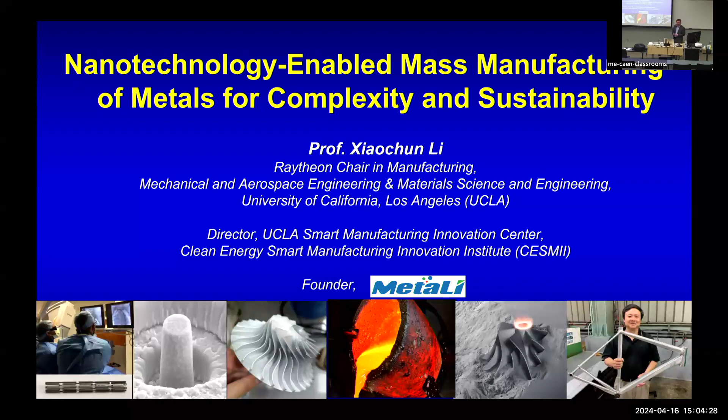Today I'll talk about nanotechnology with casting, mostly on the solidification processing side. My talk will cover different topics: introduction, and especially nanoparticle dispersion for mass manufacturing, then how we use nanoparticle effects for material control and manufacturing control, and briefly mention commercialization and a summary.

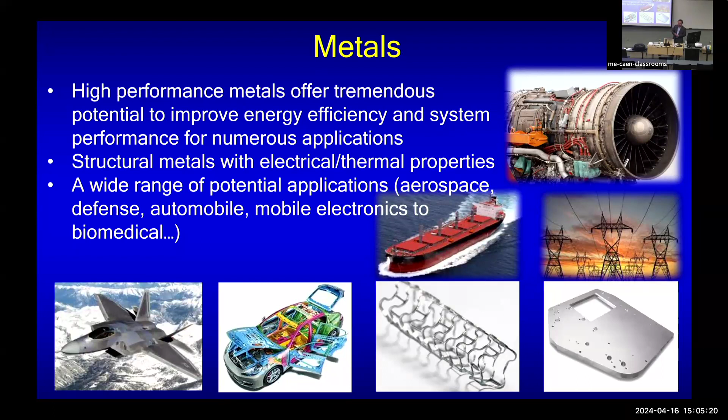Metals we already know, right? We cannot live without metals. Although people say we cannot live without internet or AI, without metal, guys, we are doomed. Metal has always been here for thousands of years, and I still like it. High performance metal is obviously very important for our life. Needless to say, electrical, thermal, chemical—almost everything. So there's a wide range of potential applications, almost everywhere: electronics, automobile, defense, biomedical, aerospace.

From the manufacturing or metallurgical method point of view, at a high level we have developed 4 platforms for guidance about the manufacturing process: alloying, like steel making—iron, carbon—and a lot of plastic deformation; also ways to make small grains, whether liquid or solid; or heat treatment to cure different properties. So these are mostly the 4 platforms we use to do the work.

This has been successful for human society for thousands of years, especially the last 200 or 150 years. It's been very fruitful and successful. But obviously we also realize metal became very mature—we take it for granted. That's why metal is not sexy anymore.

Certainly we still have some areas where we want better properties, and one area I especially want to mention is manufacturability. A lot of metals we develop as material scientists—95% of the time the material is so good, everything great, but they cannot go to societal use because of manufacturability problems. You cannot make them massive, you cannot make them low cost enough for that application.

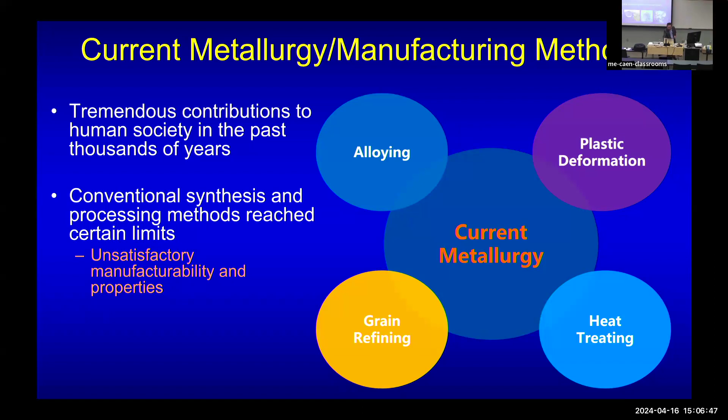Since the 90s, we've known the new dimension—I try to bring the metal side and almost bring to every engineering discipline—is nanoscience. Today we just take it for granted; we have a lot of nanoscience research that, by default, all graduate students or engineers must know.

Nanomaterials or nanoscience: we already know this, so I won't say too much detail. It's an increased ratio of interfacial area to volume, so intermolecular and interfacial forces will dominate all the interactions, and they induce unusual physical, chemical and mechanical properties. Since the 1990s there's been a lot of research, and the knowledge base built up mostly for lower temperature chemistry. The high temperature side is scarce, a little bit.

In recent years, we can move more and more into harsh environment technology, studying their behavior. Practical application is the painful spot when everyone talks to nanoscientists. What do you do? What do you apply to industry? A lot of guys say, oh no, I don't know.

That's the problem, relatively slow. Nanoscience and nanotechnology for industrial application, especially when we come to Michigan guys doing massive manufacturing, a lot of nanoscience people just say, oh no, don't talk to me, I'm not talking about massive production. So practical application is really slowed down. That's why in the last 5 years, nanotechnology is not fancy anymore. A lot of guys have negative impressions about nanotechnology because industry just doesn't get enough benefit from it.

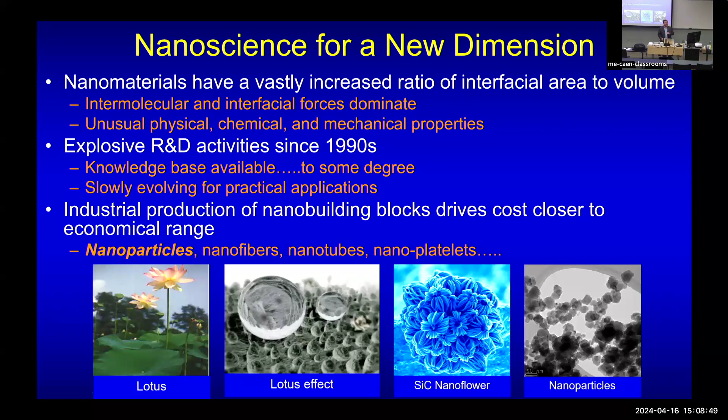For the metal guys, I'm one of the few, just like Alan. I hold the metal guy position somehow - I stuck with metal, I like metal. So what can nanotechnology do in metal? Metal can be in liquid form or solid form. In liquid form, you use nanoparticles to generate so-called nanofluids, talking about chemical, thermal storage, or battery applications - recent years for sodium, lithium, they're all metallized. How to control the dendrite or other issues, that's interesting. But most, in traditional manufacturing and metallurgy, it's about how nanotechnology works in solid state and how to control properties.

The actual theory about nanotechnology in metals is well developed, and we already know what nano can do if we do it well. All of us talk about using nanoparticles or nanoprecipitates to control strength - this is well established since the 1930s. And the pinning effect is one of the key effects to control for high temperature and creep resistance, for high performance applications.

Of course, recent years there's a lot of so-called electrical, magnetic, thermoelectric effects, mostly dealing with interfacial control using nanoparticles or nanophases. For me, I'm a manufacturing guy, and from the beginning I always set the goal for massive production and how to get nano into larger scale manufacturing.

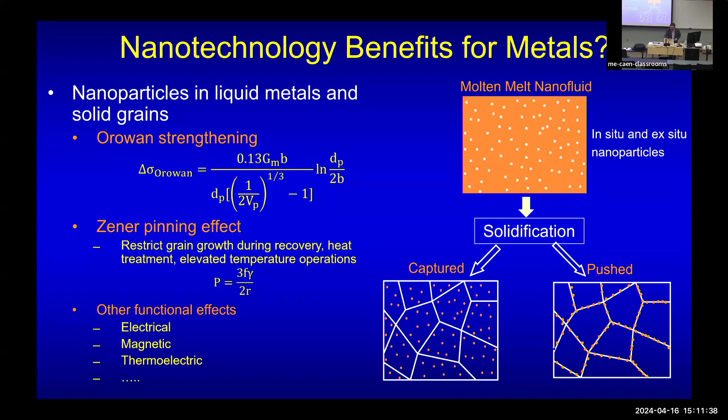So right now I'll talk about a key part of my research. This problem hurt me, dragged me down for 15 years - how to get nanoparticles dispersed in molten metal. At the beginning it seems like a very simple problem, but it turns out to be a very difficult one. And then we studied the physics.

The interaction between nanoparticles - nanotechnology came along in the 1990s with a lot of research in water-based and polymer-based systems, and they have some successful stories. Just like milk in the morning, it's self-dispersed - milk is really nano droplets that self-disperse because of a double layer effect that repels the particles. Because particles naturally at the nanoscale attract each other through van der Waals attraction.

And they will just universal, right? It cannot go against that, it's quantum mechanical. But the problem in nature is how to make them—since they like each other so much—keep some distance, some personal space.

This is a tough one, right? So traditionally, we can use electrostatic or double layer, or in polymer engineering, get surface surfactant to create steric repulsive force against them to keep space, to disperse. But unfortunately, in molten metal, this is all difficult. Actually, we have no way to accumulate electrical potential on the surface.

But of course, recently, Alan, that student, might have some special thing. I don't know, that's still a mystery. So they might have something, I don't know.

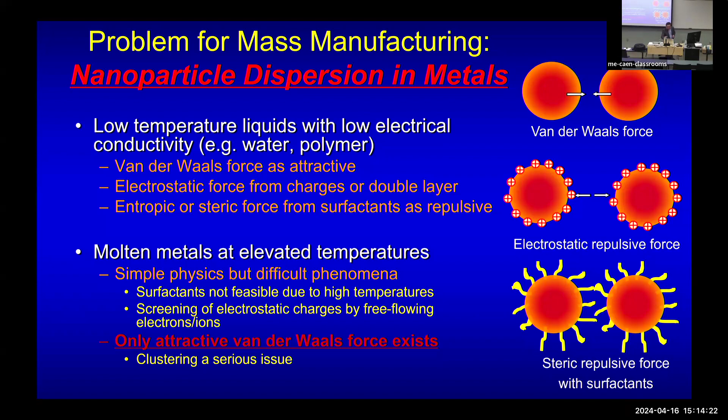So until 2015 we solved the problem by really going into nanoscience, going into physics study—especially looking at inorganic high temperature interaction between nanoparticles in the quantum mechanical domain. It's very difficult, actually, it is.

Okay, so by then we found out, this 2 nanoparticle—we wanted to keep them apart, right? Originally we thought we need to find a force. But later we found out we do not need to find a force. Actually, we just need to find an energy potential to do that. The force is the first derivative of energy, right?

So once you open up that, then we study the interaction potential between the nanoparticles. Normally they attract each other by the Van der Waals potential, right? This is a quantum mechanical factor we call the Hamaker constant—how much quantum mechanical effect they'll have, attracting each other in air or in vacuum.

And actually, we found out if these 2 nanoparticles can be close enough—quantum mechanically close enough—to the molten metal, then these two interacting with each other will reduce this potential significantly. Right? Traditionally we cannot do that because mostly we choose a nanoparticle as a ceramic particle, and the molten metal is metal, right? They just don't like each other.

Quantum mechanics is so different, until we realize there are some ceramics—like metallic ceramics—that are very stable, that have partial metallic bond. So they can get closer quantum mechanically, and then, getting closer, we can reduce the Van der Waals potential.

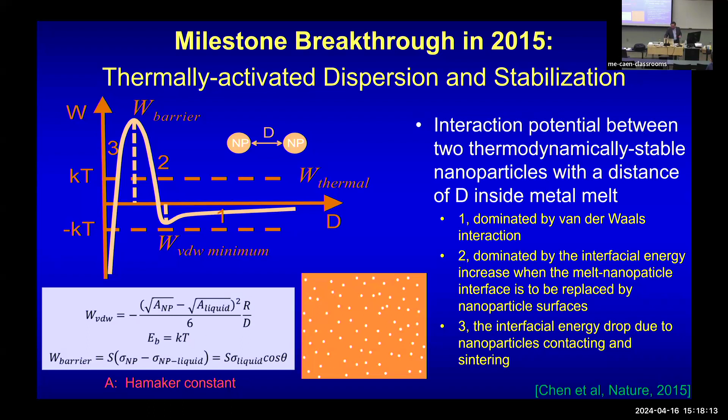This is one of the key things we discovered in 2015. After we discovered that, we were open, because we knew we could do scale-up production since nanoparticles can be dispersed by themselves. We do not need to force them. We used to use hammering, acoustic methods to hammer them off, but they always go back. But now we know we don't need to do anything—they will separate by themselves. This gets nanoparticles dispersed even at low percentages, 14%, 25%, or lower right now. Even at 1%, they separate.

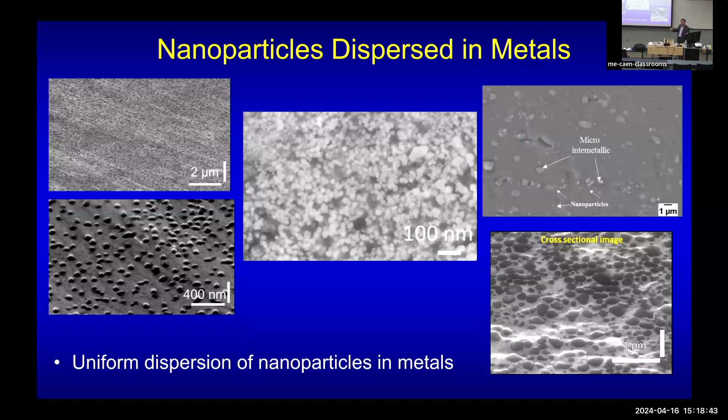That's good news. Once we have that, we can do all the manufacturing or microstructure materials control. The first thing we talked about is what nanoparticles can do, helping us from the traditional metallurgy or manufacturing side. Back in 2005, we always found one thing: we put nanoparticles in and always get a grain refiner—very good, very effective grain refinement.

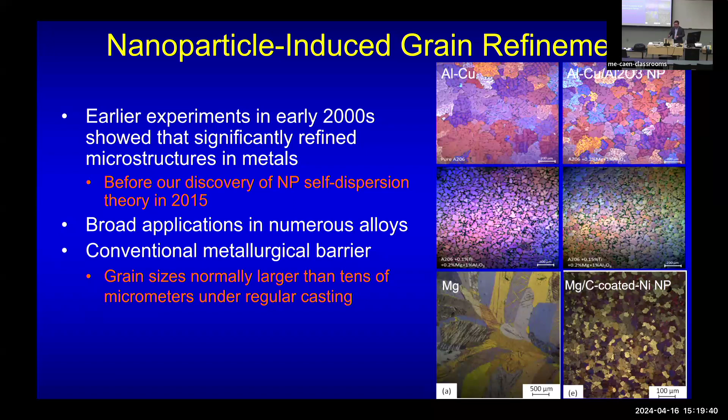Before 2015, we didn't have the self-dispersion theory yet. Our dispersion was good, but nonetheless the grain refiner was always good. But commercially, we couldn't get success because we couldn't get scale-up production. Also at that time, nanoparticles were more expensive than conventional grain refiners. We didn't have anything revolutionary at that time to make that happen. We can also see why at that time we couldn't break the traditional barrier.

Without self-dispersion nanoparticles, the conventional fundamental limit for grain size during casting is governed by this equation. The grain size equals how many nucleants you can have, how effective the nucleants are, and especially the growth restriction. Traditional nucleant theory is dependent on chemistry—when you push that solute out, it enriches in the front and blocks, pushes back, but it has a limit. Normally Q is about 50K, mostly in industry. That's why we didn't get smaller grain size, we got larger grain size instead.

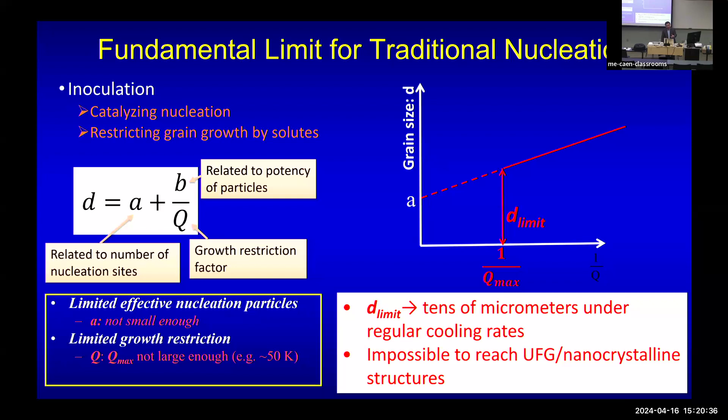That's why in traditional casting, you normally get hundreds of micrometers or tens of micrometers at minimum, really. You cannot get better than that a lot of times, unless you go with really fast cooling. But when you go with very fast cooling, you do not get mass production. So this is the dilemma there.

It's fascinating though. We studied how nanoparticles compare to traditional microparticle-based grain refiners, because the most traditional grain refiner is based on about 1 micrometer to 6 micrometer particles. They're very effective, already used in industry very effectively and inexpensively. So we studied nanoparticles compared to microparticles. We found actually we were not as good as them, because we needed much more undercooling—the smaller size particles need more undercooling to solidify, to grow the solid crystal.

So on the surface, it looked like nano cannot win. That's why around 2005, 2008, after the PhD graduate, we thought, oh, we should quit this direction because we cannot win. For this to win, we need more undercooling, meaning we need more of the processing condition to enable that.

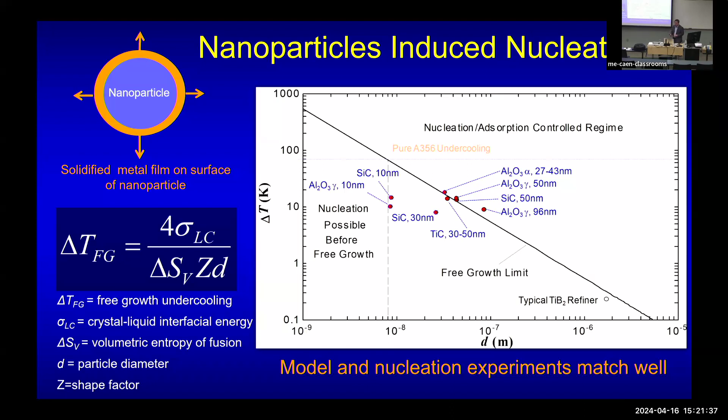Until 2015, we finally solved the self-dispersion of nanoparticles, and we came back to study the nucleation phenomenon. We found surprisingly something really unusual happening here. We all know if you work on the metal side, how to get nanocrystalline or ultra-fine grain in metal production is very difficult. Most guys rely on fast cooling for thin films, for laser processing, thin film deposition, and in solid state, use severe plastic deformation.

But in production scale, in casting, nobody can do small grains really, in the larger one. But surprisingly, in 2015, in pure copper, we put nanoparticle in a few percent. Surprisingly, just using regular casting, like 4 degrees C per second - it's quite slow, almost like sand casting and permanent mold, that kind of production cooling rate - we found really, really small grain, ultra fine, even nanocrystalline. So this really shocked us.

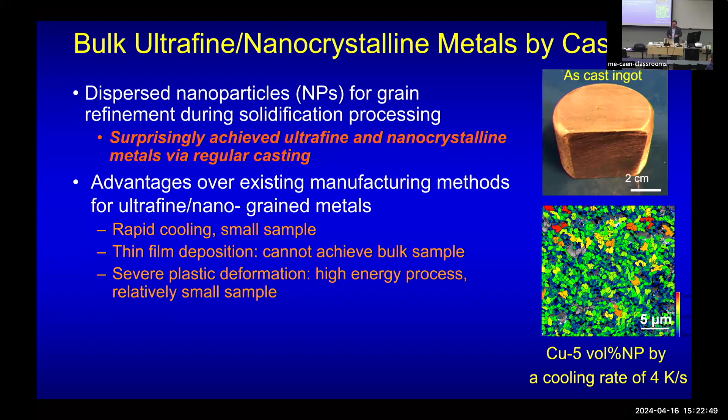Because we thought it's impossible, but right now it's made possible. That allowed us to study why this happened. We found out the more important thing is about nanoparticle-enabled growth control, basically restriction of growth. It's not about nucleation. Early on we always think, hey, more nanoparticles means more nucleates growing - no, it's not like that. It's more important that it's not only about nucleation.

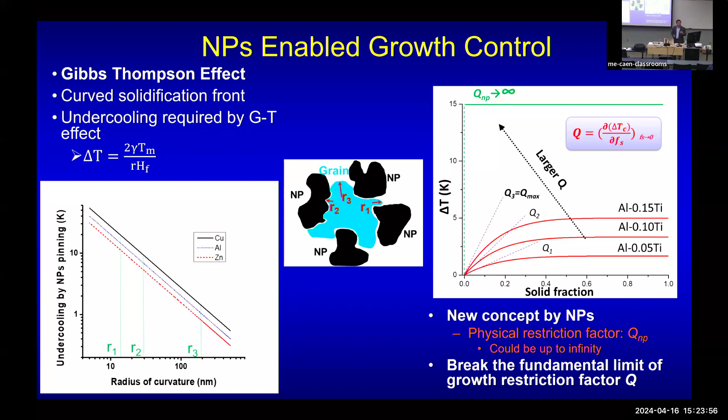So this way we really can break the fundamental limit of grain refinement in traditional casting methodology. Traditionally, the reason we couldn't get small grain is because they stop here - the Q is small, and this will stop here. Your grain size is dictated by this process, you couldn't realize your full potential. But once with nanoparticles, they not only have infinite high Q, physical Q - they almost drop here - they also allow a lot of nucleation. So you can really potentially go to nanoscale. This is the theory: nanoparticle restriction goes to ultrafine grains.

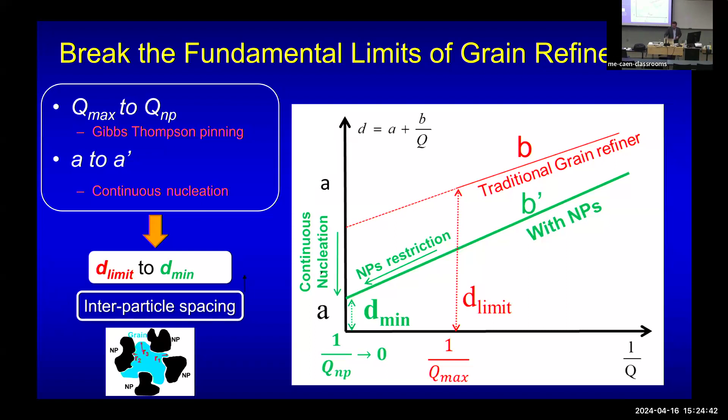And here is the difference. In traditional methodology, free growth theory, you have nucleates - sometimes we use grain refiner to make more nucleates. But once they start to grow, they grow so quickly - it's naturally so, the free growth theory: I grow, I win. So they also release latent heat, and they will kill all the nearby competitors - the nearby competitors get smashed away by this released latent heat. So they just become big grains.

But in the nanotechnology case, first of all, we need to rely on nanoparticle self-dispersion. Once you disperse well, at the beginning, the first wave, you have some nanoparticle nucleate grains - some big ones, some small ones, nucleating. But when they want to grow, the nearby nanoparticle pins them down - they block you, they cannot allow you to grow. It's almost like on a freeway, you allow the e-bike guys to go on the freeway and say, don't kill these guys, they have the same right as you. No matter how high speed your car is, you need to slow down.

So this exactly happens - it's almost like socialism, truly socialism I tell you. It's blocked, and then the nearby poor guy says, oh, it's my opportunity to grow now - and blocks you again, and then grows again and blocks you again. So it's like continuous nucleation, continuous growth restriction. This is way different from traditional methodology. Traditional methodology is one shot - I win. Once I win, I grow very quickly, occupying my space as much as possible.

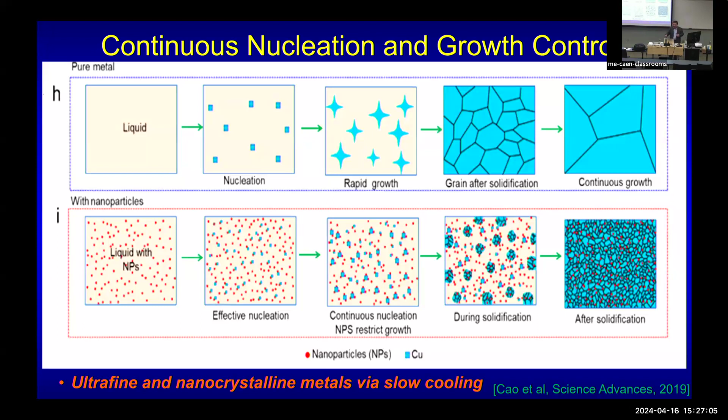Previously, the dendrite stuff, the block liquid here, that's the key for hot cracking, right? But right now, with nanoparticle, they're all globular, very small, uniform - they do not have the issue like traditional hot cracking. That's exactly the reason we do not have the hot cracking issue anymore.

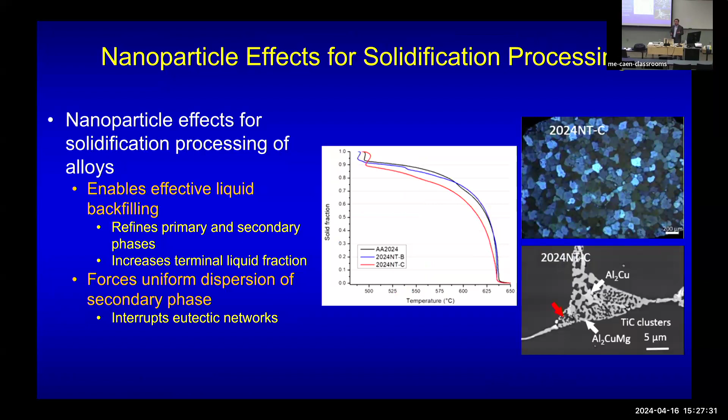This is one of the big discoveries for nanotechnology. It also refines both primary and secondary phases, increases terminal liquid fraction, and makes the secondary phase more uniformly distributed. This makes our mass production much more desirable.

So here I go to the manufacturing. After years of research, instead of focusing on strengthening effect - because from 2000-something to 2010, most of my research focused on how to get stronger metal, how to get better metal -

after 2010, 2015, we mostly focused on how nanoparticles can change the phase, control microstructure, and enable manufacturability of traditionally impossible alloys.

So nanoparticles can help enhance nucleation, restrict grain growth, and modify secondary phase in one shot. Traditional metallurgy needs almost 2 or 3 methods to realize these 3 functions together, but we can do it in one shot using nanoparticles, and get unusual control of microstructure and phases. We can get a homogeneous grain structure, and then get enhanced properties.

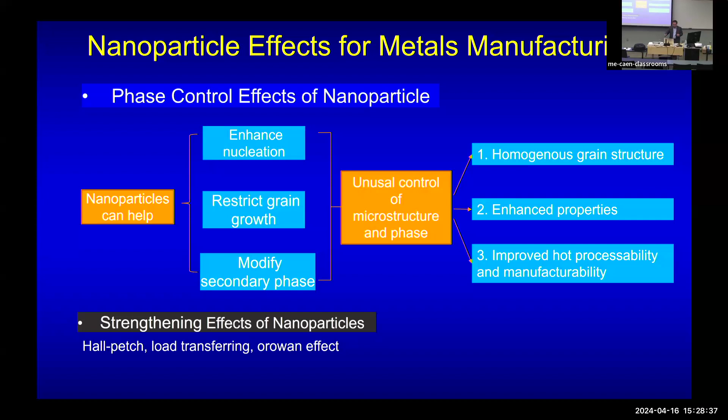And especially here is a new one - I would say our niche here: nanoparticles enhance hot processability and manufacturability. So we'll go to detailed applications.

For example, take aluminum alloys. Aluminum alloys are divided into 2 big categories: one's casting alloy, one's wrought alloy. Casting alloys normally, you want complex shapes but cheaper - production cheaper. Wrought alloy, we want high performance, aerospace and vehicles a lot, high performance. They don't use the same method.

Casting alloys use solidification processing, liquid. Wrought alloys use plastic deformation and machining to get geometry, to get properties. So you can compare the strength, ductility, conductivity, including thermal and electrical - the wrought alloy wins all. So the only thing where the wrought alloy cannot win is castability.

It's difficult, but other things like surface quality, especially anodizing, anodization, for all the cosmetic applications - for example, Apple's very good products, beautiful products, because anodizing makes colors appealing. Normally wrought alloy is doing good, cast alloy is very poor.

So we can see wrought alloy is really desirable, but a lot of times because they're more expensive, people go to the casting alloy for shapes, for low cost. So what if we use nanoparticle, nanotechnology to unify them - basically casting wrought alloys? This is the area we want to go.

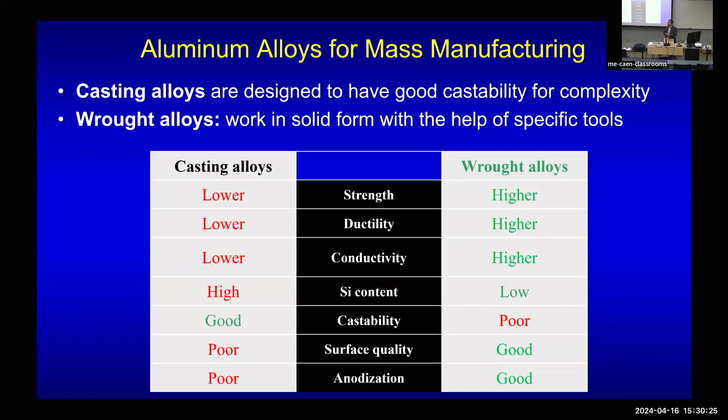Basically, take advantage of the shapes, also the performance of wrought alloys. To be fair, people spend decades working on this area, trying to unify these two together, but it's difficult to solve the hot cracking manufacturability problem, and nano provides a new method.

High performance wrought alloys in vehicles, a lot of 6000, 5000 series, and also aerospace, a lot of 7000 and 2000 series. It's high performance, high strength-to-weight ratio, and exceptional mechanical properties. But unfortunately, normally they are not good for casting - they must go through shaping.

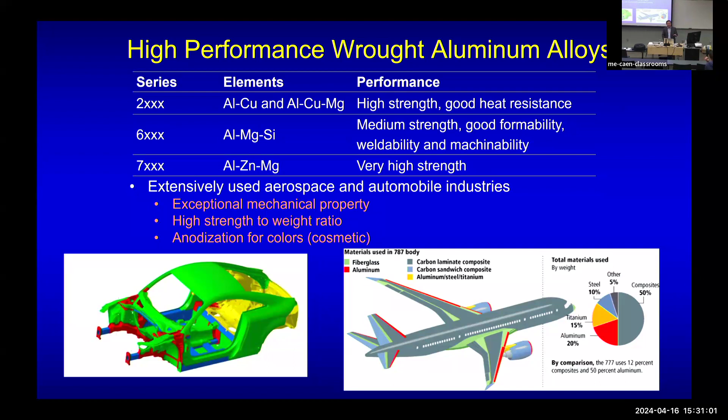But of course, we do that because we have no choice. But I would guess if you have a choice, you want to do casting of this - that will be very fast, high efficiency, and low cost. So this is the way: can we do manufacturing like casting for the wrought aluminum alloys?

So certainly we already identified the problem - difficult, if not impossible, to cast the complex geometries in that 2000, 6000, 7000, or 5000, even 3000 series. So for that, they really have energy intensive extrusion or rolling processes, and energy consuming machining for shapes, and a lot of metal waste for sure.

And they're also much more expensive, actually - not because of material in some way. The material might be similar cost, but really it's about manufacturing cost - how to make manufacturing feasible and low cost. So traditionally, some areas are weldable, but a lot of areas like 2000, 7000 are not weldable, and also have low thermal stability.

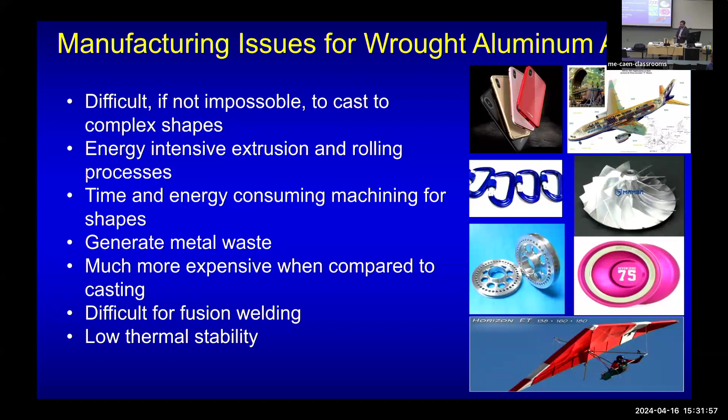So why are wrought alloys, aluminum alloys, difficult for casting? The number one killer is hot cracking susceptibility. It's because during solidification, traditional methodology has dendrite growth, right? They quickly occupy space and then encircle the liquid in the solid phase. The liquid has no way to backfeed, no way to compensate for the shrinkage. Then you have hot cracking there, a lot of hot cracking, or you have huge grain growth there. So this problem is really about contraction and nucleation behavior.

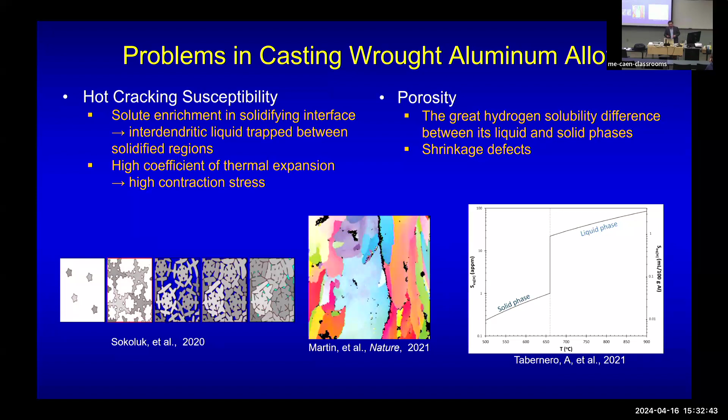And also there's a porosity issue, right? They have hydrogen bubbles during casting for wrought aluminum alloys. And nanoparticles can really solve the problem quite well, right?

With nanoparticles, we always get equiaxed, globular grain, and they grow very slowly, gradually. So their solidification zone, the latent heat zone, is a little longer than conventional because the nuclei grow slower, allowing during the latent state much longer time for liquid to penetrate and backfeed. So this way we can solve the problem, even with low percentage, which is good for industry guys - lower cost, lower percentage, better economics.

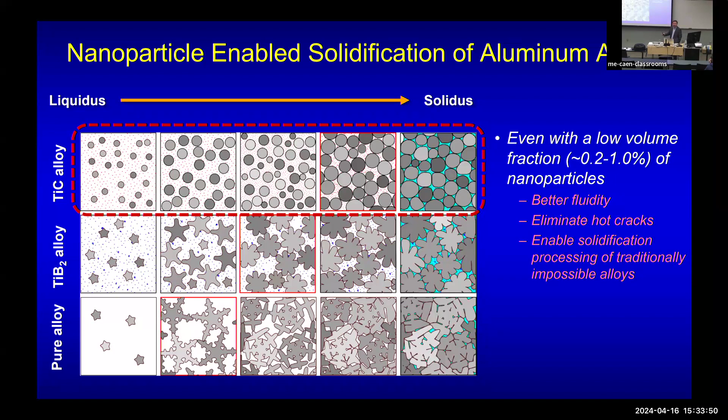And here is the first one - nanotechnology-enabled casting of 7075. 7075 is an aerospace alloy, the highest strength in the commercial domain for aluminum alloy. This is normally very difficult to manufacture. Generally speaking, aerospace industry talks about buy-to-fly ratio, right? Like 10 to 1, meaning you buy 10 kilos, you only use 1 kilo to go to the sky. 9 kilos is all machined off.

So this is really a costly process. But right now you can see we can cast them directly, this shape. Traditionally you need 5-axis CNC milling to do that, but right now in one cast we can get the geometry. And also because of nanoparticles, we get very small grain size with very slow cooling. And even after T6 treatment, grain size is still very small, right?

So this way, for the first time, we can do aerospace alloy casting, solving the manufacturing issue, lowering the cost, no hot cracking, and easy to cast complex shapes. And by this way, reduce grain size, everything, reduce stress corrosion, and especially reduce buy-to-fly ratio by 10 times. Basically, our raw material might be more costly than the original 7075, but the manufacturing cost is 10 times less than traditional manufacturing. So that's where we win. It's more like nanotechnology-enabled manufacturing of the alloy, right?

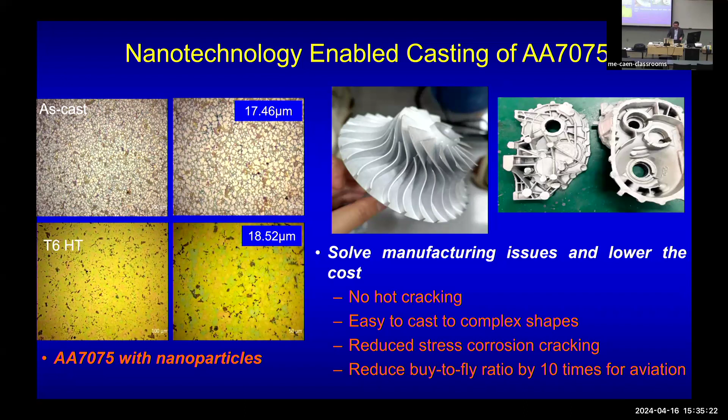And here is another massive production example. Because I'm a manufacturing guy, I'm always looking for massive, big scale manufacturing. After we get self-dispersion nanoparticles, we can do big scale production, tons of it, because with high speed, high pressure die casting, it's almost like 20 or 30 seconds to make one component. That's where, for Tesla guys, they make a gigapress to make a whole car body in one shot, which takes minutes. But this is a very efficient, low-cost way to make complex geometry, larger scale structures, and thin-wall structures.

You have molten metal feeding here, quickly injected at meters per second, very high speed injection. And they talk about cooling rate, about welding cooling rate, 100 degrees C per second. And then the machines can be 80 to 8,000 tons, and today they go to more than 10,000 tons now, right? And that's the machine - very high speed, very highly automated.

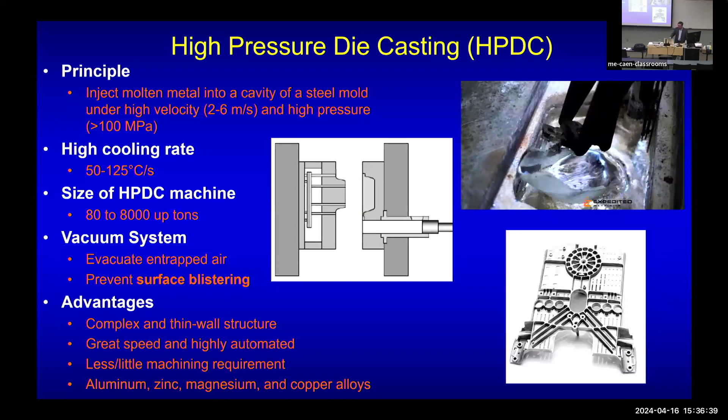A lot of consumer electronics, automobile industry rely on this process a lot, to make low cost and high performance components, especially focused on aluminum, zinc, magnesium, and copper alloys. And high pressure die casting is a quite rapidly growing industry, because more and more components are produced by high pressure die casting.

Even going to larger scale, like Tesla guys, with the gigapress. So all this is really for automobile, electrical, electronics, and cookware - everything, right? Still about 8% annual growth.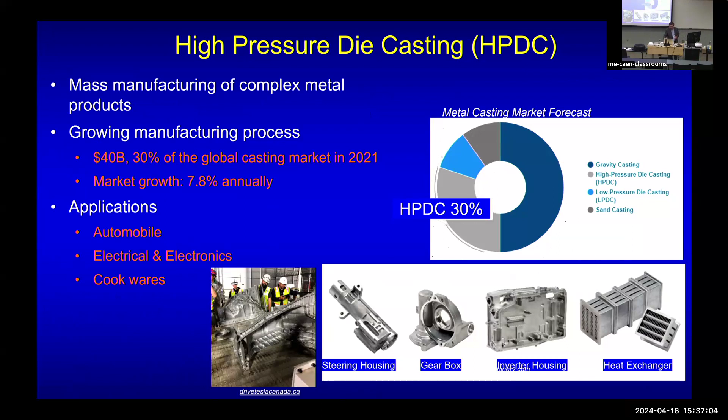And here, traditionally, we have a problem for high pressure die casting of high performance aluminum alloys, like wrought alloys - 6061, 2024, 7075. You cannot do high pressure die casting because hot cracks will kill them. And people tried, okay? It's not like people weren't trying for a lot of time. It's cracking like crazy, you couldn't solve the problem. And also poor fluidity because they couldn't flow well, and also they have a lot of shrinkage and gas porosities.

But with our nanotechnology-enabled mass manufacturing, by solidification, we solve the problem, right? We eliminate this, enhance this, and mostly distribute that, and also eliminate that.

So all this come together, we put here. Really, nanotechnology combined with wrought aluminum alloys and combined with mass production, like high pressure die casting or squeeze casting, which is another type of high pressure die casting, combined together we can make mass production of aluminum components, and even make anodizing components.

So here is some of the products we produce, not in my research lab, but more in my company, Metali. So this commercialized all the products. You can see we can produce that nanotech-enabled. Traditionally, it's impossible to use this alloy to make the components, and also make anodized colorful products.

So this one, frame, and this one I mentioned, this is for electric vehicle control. Traditional gasoline vehicles might have maybe $200 something for the thermal control stuff. But for the EV, normally today they mostly talk about $1,000 to $1,500 control units to control the battery temperature, control the motor, control all the systems, air conditioning, everything.

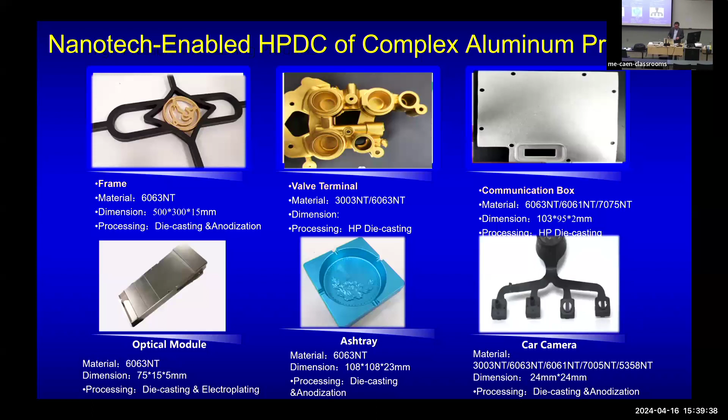And of course, this car camera for the autonomous vehicle. This one talks about like 10 billion parts worldwide, like that. But of course, this one is not so good as ashtray. A lot in US, not popular, but in Asia there's still quite an ashtray, the colorful product.

Here is like another high pressure squeeze casting. So we can get e-bikes, make bike motor box and the motor bracket. The motor bracket is 7075, 6061, 2024, and the vane wheel and the hard disk, like for this kind of computer technology, and also valve terminal, and also battery cover.

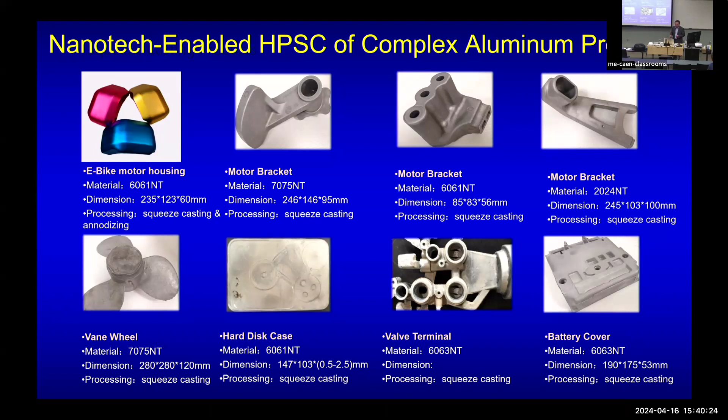We commercialize this one for battery cover, especially with thermal conductivity in the 6,000 series, 6063. Thermal conductivity is one of the highest among the commercial aluminum alloys. But traditionally, we cannot do casting. We must do forging and machining, very costly. So today we can go much cheaper and much more complex geometries.

So with that, we can see the benefit of nanotech enabled high pressure die casting. We enable massive casting, day in, day out, for complex parts with complex geometry, all high performance wrought aluminum alloys. So we really enable much wider material choice for mass production.

And then we almost completely eliminate hot cracks. This is one of the big killers for traditional alloys. And also almost completely eliminate gas bubbles. This allows the die casting component to be welded, to be joined together. Traditionally, the high pressure die casting component is very difficult to weld because there are a lot of bubbles inside. Once you weld, the bubbles just come out, creating defects. Right now we can do that.

And also superior grain size and fine microstructure and properties: tensile, ductility, thermal stability. Surprisingly, the fatigue life, we get enhanced a lot. That's one thing 10 years ago we do not believe. Nobody believed it. Most people think, oh, you put a nanoparticle, a heterogeneous particle, you will reduce fatigue life. But actually, in recent years, we found that we enhance fatigue significantly. It's because the nanoparticle blocks the crack initiation, also blocks the propagation. So that's a surprising effect.

But anyway, also working with the big companies, especially for the cosmetic consumer electronics domain, we found we need colors. I need all this kind of different color to match all this industrial product. And this is all by anodizing. Traditional casting alloy cannot do that because you have too much silicon, they will not get the color out. But right now we use wrought alloy, you don't have the silicon there to block you, you can make all the colors out. So this is one of the biggest, fast growth areas for our application.

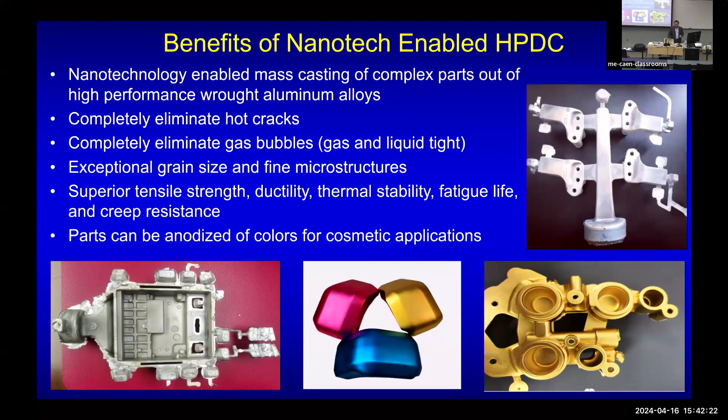Of course, I'll quickly move on to another solidification application - welding. Naturally, we solve the casting problem: we do the high pressure die casting, we have a cooling rate about 100 degrees C per second, and welding is exactly in that domain, about 100 degrees C per second for arc welding. So we also commercialized, put this wire, manufacture that, and scale up production.

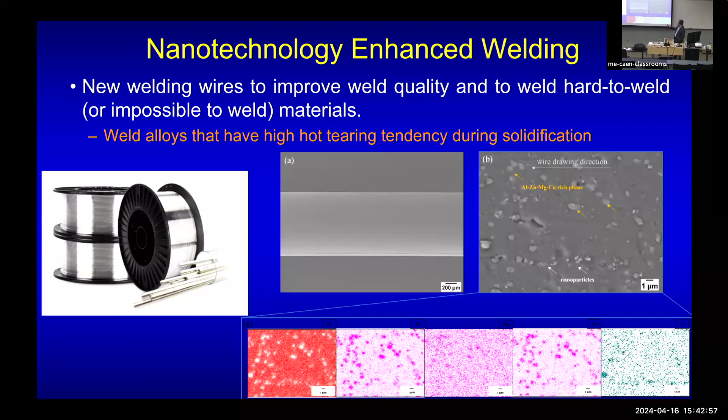Right now we can produce nanoparticle dispersing molten metal in big scale, so we can make all kinds of manufacturing, no problem. We make wires, rods, with nanoparticles dispersed there. We can really weld alloys traditionally impossible to weld, such as aerospace alloy 7000, 2000 series. We are the first one in the world to make that.

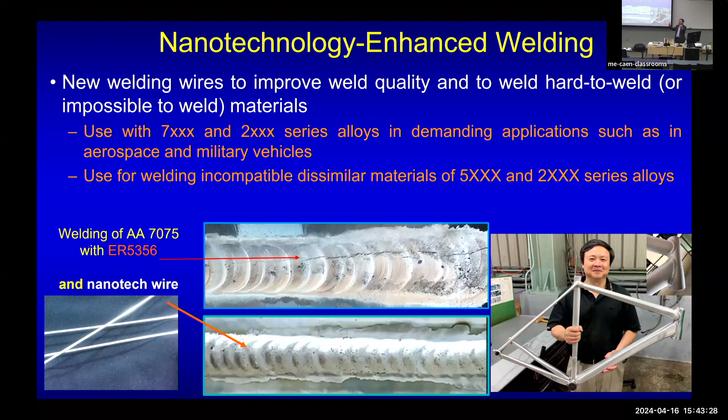This technology, we've gone to 65 countries already with this welding technology for welding and additive manufacturing. We can also weld the traditionally impossible combinations, dissimilar welding like 5000 to 2000. You cannot normally weld them, but right now we can weld it together. So this is good about nanotechnology.

Here with the nanoparticle, you can see that without nanoparticle there's always a continuous phase, and a lot of hot cracking. With nanoparticle, it's much more dispersed. So this way we can really eliminate hot cracking and make the performance much better.

Also, because we use the same filler metal - for example in the automobile industry mostly we want to use 6061 or 5083 - normally you must use dissimilar welding rods with different chemistry to avoid hot cracking during welding. So you shift the chemistry away to a safe zone, and by that you pay the penalty of strength. Normally strength reduction goes almost to 30% sacrifice, penalty.

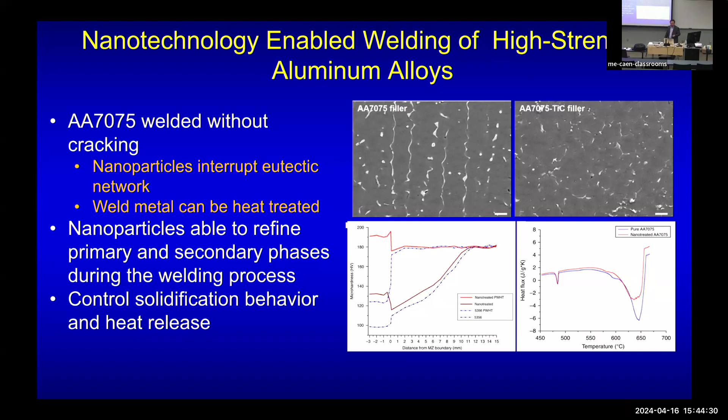But with our nano composition, if we go to heat treatment, we can recover 100%. So this is one thing for welding. And also, obviously, welding and additive manufacturing are almost like twin brothers - you can do welding, you can do additive manufacturing.

So wire arc additive manufacturing, obviously we know has high deposition rate, 10 or 20 times faster than powder bed, which can mess up. And material efficiency is almost 95%. And you can print the largest scale structures, especially for the automobile and aerospace industry, for large single structures.

That's great, but the problem for the traditional WAAM process is inhomogeneous and coarse grain structure - without nanoparticle it's always like that. And anisotropic, heterogeneous mechanical properties, excessive distortion, reduced efficiency, and surface roughness and dimensional accuracy are poor.

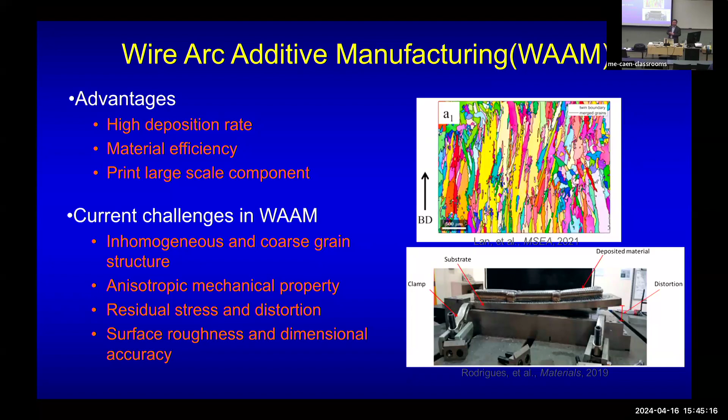But with our nanoparticles, with our nanotechnology, we can completely eliminate hot cracks - there's no problem. And no matter how thick a layer you build up, nanoparticle always controls the grain to equiaxed fine grain, almost dendrite free. So for us, we don't care how many layers you build up. We don't worry about dendrites, we don't worry about columnar growth, because nanoparticles block them.

Printed parts can have high performance, with significant reduction in porosity and deformation of printed parts. I won't go into details, but the reason is we can also control residual stress and distortion - we just had a student defend a thesis two weeks ago on why nano solidification reduces that, because of solidification behavior differences.

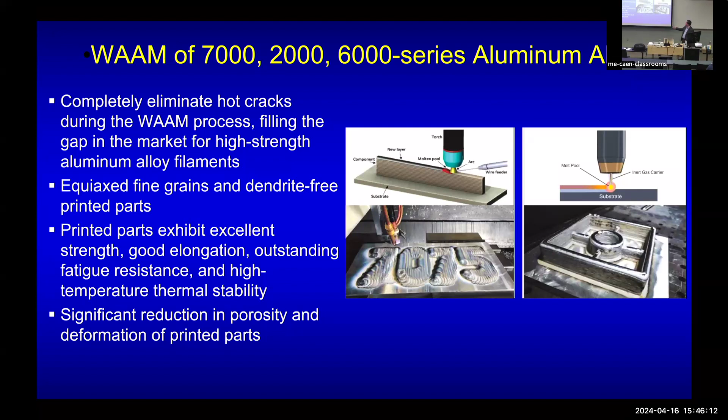You can see TIG welding based, MIG welding based, you can do 7075 or structural stuff. I want to show you the 7075 because a lot of people want 7075 high strength, but with wire-based deposition, TIG-based deposition, we can get almost up to 600 megapascals with about 10% ductility. This is superb property after the WAAM processing, and especially you can see 12 layers from bottom up - 12 layers, grain size about 20 micrometers without any change.

This is unthinkable in traditional methodology - you just cannot control grain size from bottom up to be the same. But because nanoparticles are there, they control it very effectively.

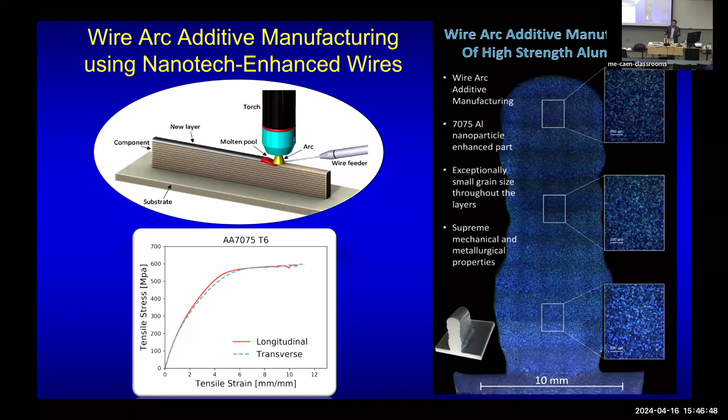And of course a lot of people go to the AM, additive manufacturing, powder bed approach. At the beginning I resisted, because my PhD thesis 20-some years ago was in powder bed and also DED. I thought I was done with that, but after 2012 everybody said, let's do that. So I came back to do it again, this time with nanotechnology.

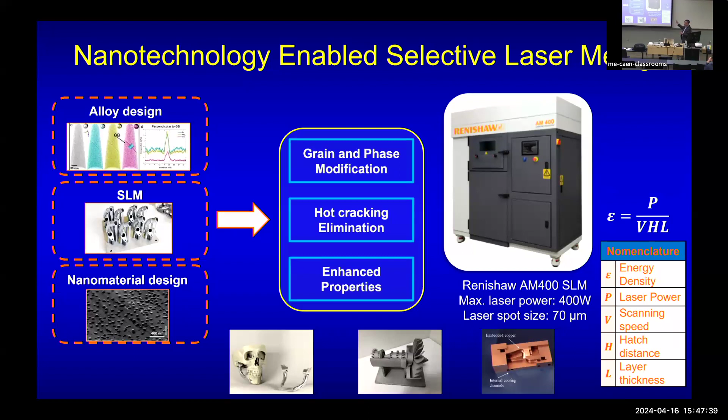So nanotechnology-enabled AM, fusion-based AM, is powder bed in a different way. You have alloy design with additive manufacturing, laser-based, and nanomaterial design. Altogether we control the synthesis to make traditionally impossible alloys like 7075, 2024, 6061. This is just a manufacturing method to control the energy input, and here we can produce ingot. So basically all this technology goes back to our nanoparticle dispersion capability for massive ingot production. Once we have ingot, we just send the ingot to a gas atomizer.

They can gas atomize the powder like this. And this one already has nanoparticles embedded inside. With this one, we already have microparticle 7075 with nanoparticles inside, about 1% titanium carbide nanoparticles.

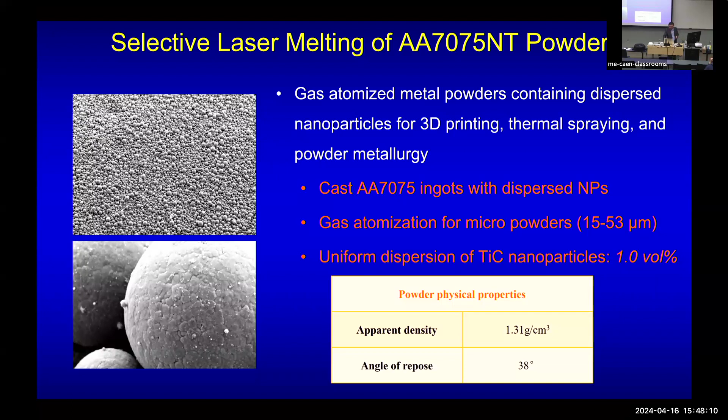In recent years, we're still polishing this paper. You can see the properties we get under really different conditions, as printed. We can go to 600 megapascal, about 8% ductility. Go to T6, we can go to almost 800 megapascal. It's much better than a lot of titanium alloys, in terms of specific strength.

And also with HIP, because it gets rid of cyclic porosity, we can get 16% ductility. If HIP plus T6, we can get about 9% ductility with 700 megapascal. This is probably really, really high compared to any other aluminum, even stainless steel. You cannot compete with this property.

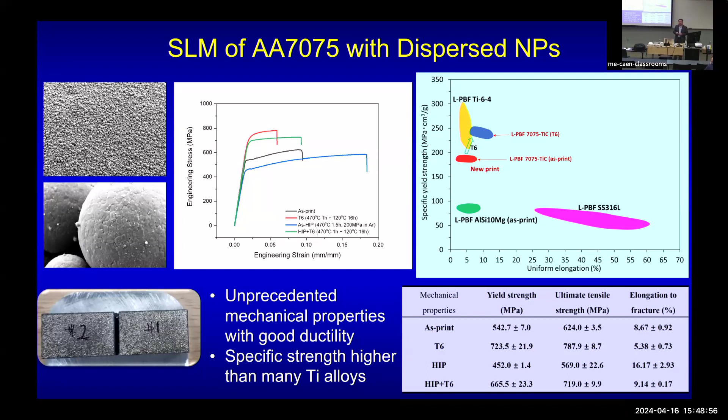So that shows nanoparticles not only solve the manufacturability problem, but also enhance the property significantly, especially combined with laser processing. Here I summarize it: nanotech-enabled metals manufacturing is really good for massive manufacturing of complex geometries, complex part structures, and also creates exciting new manufacturing space for high performance metals, like aluminum alloys.

In recent years, we also go to high temperature metals like steel, nickel alloys, super alloys. Same principle: nanotechnology to control the microstructure, control the phase change, control the solidification behavior, and offer very high performance for sustainability.

For example, we can really reduce the cost a lot for many consumer electronic components, because traditionally we rely on machining, forging and machining to do that. Right now, we can do it in one shot.

So this nanotech methodology, or nanotech-enabled manufacturing, really starts with the nanoparticles or nano elements, fabrication and production - massive, low cost. Then goes to nanoparticles, how to mix, how to disperse in molten metal, and go to solidification with different technologies - casting, welding, and deposition or anything. Then post-processing: heat treat, extrusion, rolling, machining, joining, for all these kinds of processes.

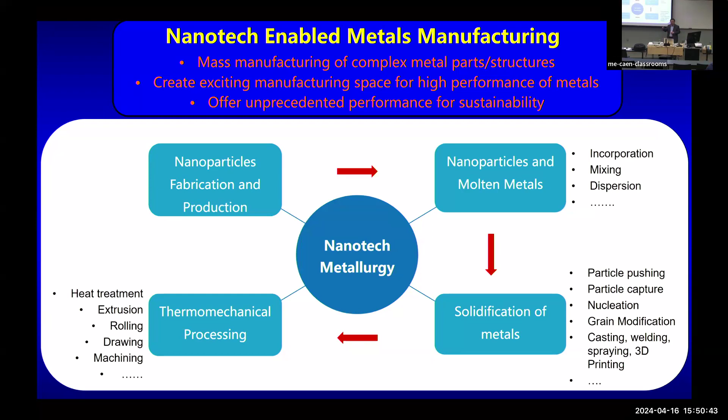So the good thing about this is it seamlessly combines with traditional manufacturing. This was the beginning - over 20 years ago, I told myself I want to do massive manufacturing with new nanotechnology. That was my goal 20-some years ago. I'm glad today it's really come along for that purpose.

And then finally, of course, just briefly - I know we are at the university, we're supposed to not say much, but hey, just to talk about real applications. I found MetaLi after I solved the nanoparticle dispersion problem. Right now, we really say: cast the uncastable, weld the unweldable, print the unprintable.

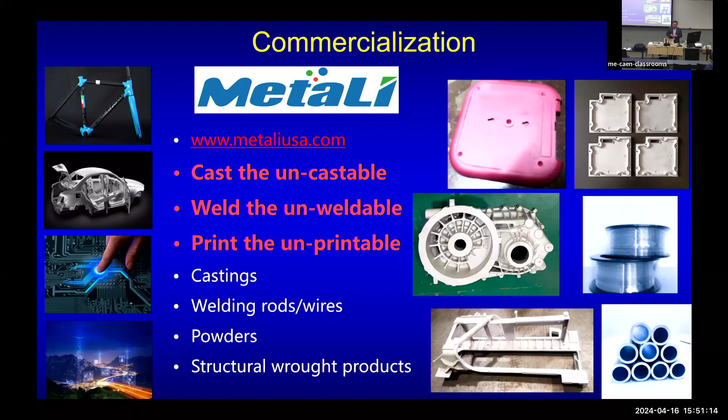So some products here - like we mentioned, our product is in mass production and goes worldwide, for these applications. So here, just to summarize it.

I think number one, the contribution so far in my research and engineering practice is overcoming the long-standing problem of dispersing nanoparticles into molten metal, by self-dispersion and stabilization. So nanoparticles are really effective in breaking the metallurgical barrier and the manufacturability barrier in the traditional sense, enabling us to have unusual microstructure control, processing, and manufacturability. So on this new pathway, nanotechnology-enabled mass manufacturing of complex metal parts and structures can really enhance our performance and enhance sustainability.

And the successful industrial application for casting, welding, and additive manufacturing is going on the way. Also, this methodology can go to all kinds of metals basically - not only aluminum, but also copper, magnesium, zinc alloys. So, yeah, with that, thank you.

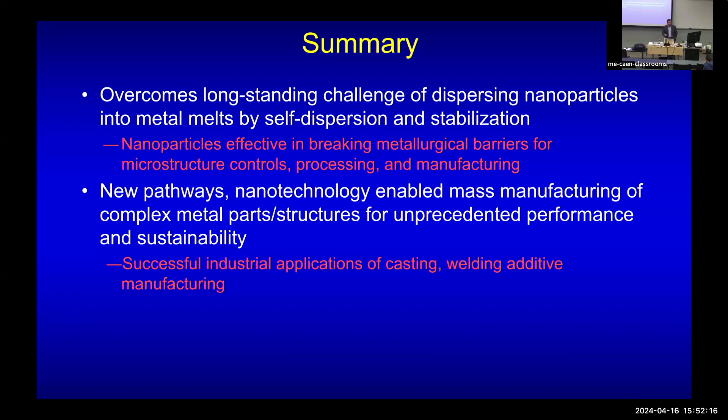Taking me 50 minutes. Perfect. Okay, thank you. Any questions?

You tried it in titanium? I tried for 2 years, 1.5 years, but I had a problem with nanoparticle stability. I can disperse them, but they react away. So I think I will go back to that direction, especially titanium alloys. We know the property is great, but we just couldn't do manufacturing well. So that one is really the next phase I want to do.

Even oxide particles - the oxide will not dissolve, but they cannot disperse because based on the theory, they cannot do that. But today we talked about a new secret weapon to disperse the oxide there, so that's another domain - going to high temperature, going to tungsten alloy, nickel alloy. So this next phase of my research is how to get stable, unwettable nanoparticles dispersed in molten metal. That's another domain - yeah, we're getting there with another method.

Thank you, Dr. Li. So I have two questions. The first is that when you say you are casting the uncastable, you showed how, but I didn't quite get it. Have you compared your cast product's mechanical properties with conventional wrought product's mechanical properties?

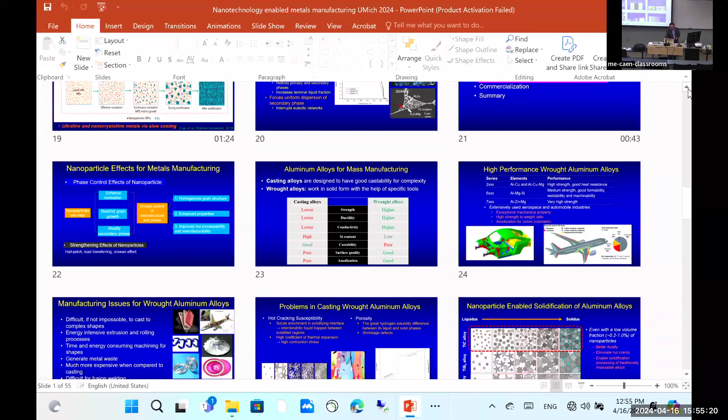I'm very interested in the theory you talked about, how the nanoparticles restrict dendritic growth and keep everything equiaxed. Is this a theory or do you have evidence to prove this process?

Yes, let me be careful. We have mostly indirect evidence to show that. We do not have direct evidence. That's why I try to work with Alan to get real neutron data, to see how the nanoparticle restricts growth. But unfortunately, even with neutron, the speed of nucleation and growth, the nanoparticle is so small, we almost need 10 nanometer resolution in X-ray in real time. So this part we're still trying to get there.

But indirectly, by thermal analysis and microstructure analysis, we have that evidence. We can see the nanoparticle pin down the grain boundary. We also found that the nanoparticle allows us to release latent heat very gradually. Traditionally, nucleation is one shot - you release latent heat very rapidly, quickly, and then solidify. For our process, it's more like a very gradual release.

That's because of continuous nucleation, multiple nucleation events. It's almost like you have multiple nucleation events over time. Traditional free growth theory has no multiples, just one time. Of course, you can have multiple particles nucleate in one shot, or fewer particles in one shot - you only have one shot opportunity. You win, you win; you don't win, you stop.

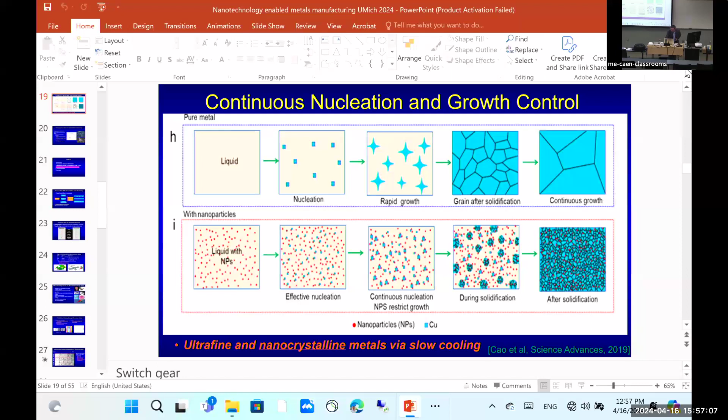But the nanoparticle process is like multiple chances - socialism, right? It's almost like you're rich, you buy a house first, but stop, don't buy a second house. The second guy, lower income, buys a house here, and another guy buys a house there, like that. That's the way we can see it - actually I have one slide I didn't show here.

I occupy as much space as possible, the grain dendrite grows. But the nano stuff doesn't allow you to go there - it only allows it slowly. And that's exactly the key scientific reason we eliminate hot cracking, because latent heat is released very gradually and liquid continues to flow. So, like that.

Okay, great, so that's the reason. Thank you so much. Thank you.

This is so cool, this is really new. It's physically based, right? It's physically-based restriction of growth. Traditionally it's all chemistry based - based on chemistry solute enrichment to block the growth. That's why it doesn't work as well, because the atoms are free and move so fast, diffusivity is so high in the liquid state. But nanoparticles don't move very fast.

They're almost like biking guys on the highway, compared to the cars. Originally we treated that as a weakness, but right now, in this case, it's an advantage - you slow things down like that.

Okay, next, thank you speaker.